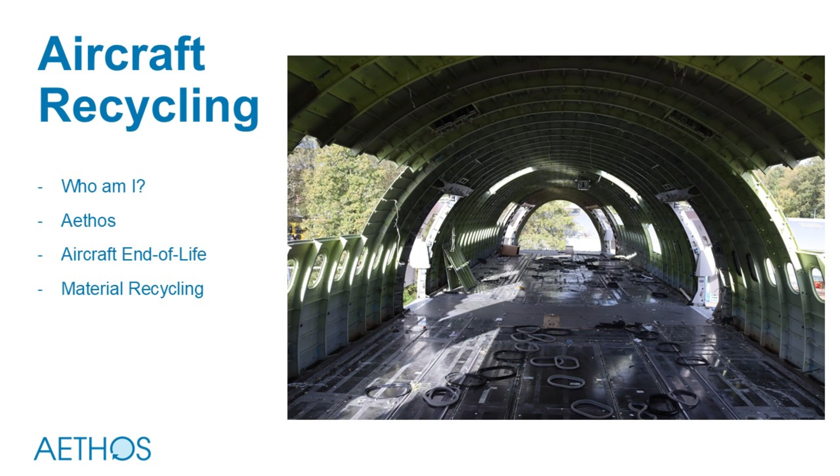Okay, so let me first tell you a little bit about myself. I was born in 1979, the 31st of December, so I'm from the 70s for 12 hours. To be honest, I was born in Rotterdam, but I am a PSV fan - is that okay, or is that an issue? I only lived in Rotterdam for one day, then moved to Oud-Beijerland. Not sure if some people know that small town. My mother was born there with a lot of family, and after that I moved to Brabant. But eventually I ended up studying aerospace engineering at the Technical University in Delft.

I did my thesis on the subject of how to recycle an airplane - a subject nobody had really done before. There was also a sustainability note possible on my diploma that I wanted, and I got it, because next to the research I also wrote a business plan. It was pretty clear not a lot of attention was being given to how to recycle airplanes already. In 2006, I was raising the bar, so I started a company called AELS, which stands for Aircraft End-of-Life Solutions.

The idea was to help people who stop flying an airplane do something with it as good as possible. So I built that company for many years. I even joined AFRA, the Aircraft Fleet Recycling Association, and became president of that foundation, where all the companies active in aircraft disassembly do it as good as possible. They share their challenges, share their solutions, and try to raise the bar in the safety of the aviation world, but also the safety for the people doing the jobs - all the elements that are part of safety, and making money I guess as well. Those were the discussions we had in that group.

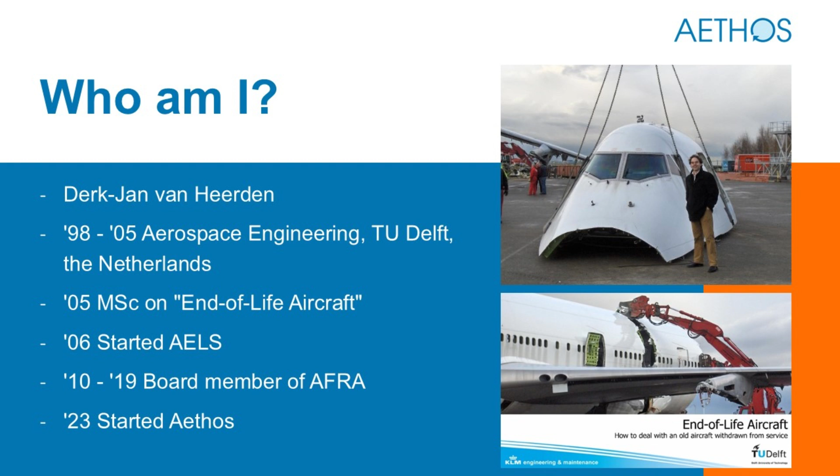But because of a reason, I stopped working for AFRA, because after 9 years on the board, where officially you were only allowed to be there 6 years, I was already an illegal president I guess. But I also left AELS, and then I started a foundation called Aethos, and I'm going to share more about what we're trying to do there. We're trying it - we're doing it actually, to be honest, yeah.

So what is Aethos doing? Aviation is very good at reusing components - I'll share more about that later, but it works pretty well. Some airplanes stop flying, and then parts are removed to keep other airplanes airworthy. Safety and all those elements are part of those challenges, but we can do that. Then there is repurposing - does somebody have an idea what that means? Yeah, just using the component for a different purpose than it was originally designed for.

A lot of people think about aviation recycling as having a piece of an aircraft at home designed into a table, or even done professionally, as with cockpits being removed. That's why in that picture you missed the cockpit, because it will now be used to build a simulator to train pilots.

Training in a simulator instead of flying an actual airplane is cheaper, obviously one of the main reasons, but also better for the environment, because flying consumes a lot of kerosene.

Then there's recycling, which means recycling all the materials left after everything that can be reused and everything that can be repurposed has been removed. That's where Aethos is working, trying to raise the bar on the materials that remain after all the creativity for reuse and repurposing has been done.

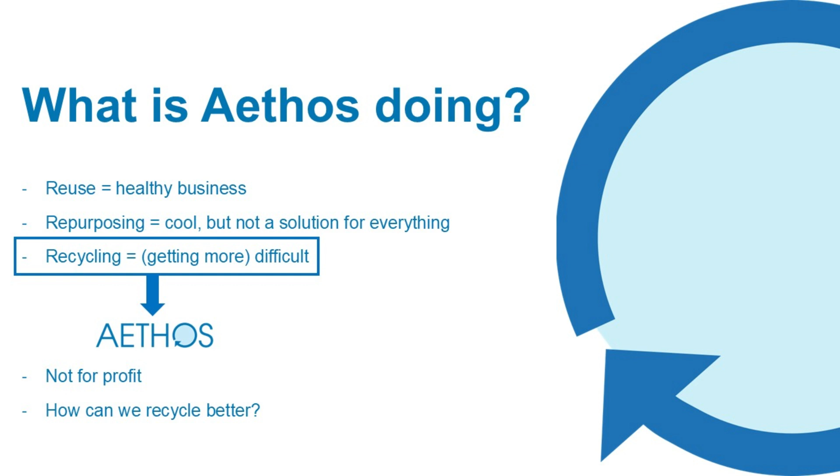Let me explain a little about how aviation works. There's a new airplane - currently there are two big builders, Airbus and Boeing, and they make an airplane, and those get older, right? They fly and fly. Does anyone know how old airplanes average before they stop flying?

I'm guessing it's pretty similar to the shipping industry, but I'm not sure.

About 25-ish, depending on the model and whether there's a cargo conversion where passengers are transferred into cargo use, which may extend the life. Some other aircraft are less interesting to do that with.

So that's probably pretty much similar to windmills as well, I guess, right? A lot of windmills will probably be somewhere around 25 years - at least I've been told. I'm not sure that's correct.

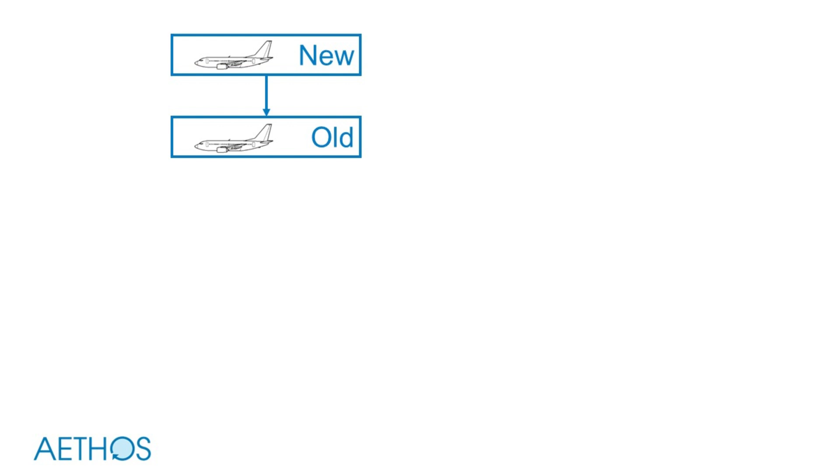When they get older, an airline will say, I will stop flying this airplane because I ordered a new one, or because I went bankrupt, or because they decided they needed a bigger one - all different reasons can be there. And then a decision needs to be made.

Depending on how old the aircraft is, but also where it is in its maintenance cycle, a decision can be made. Maybe somebody would say, I want to keep flying it, and that happens very often. Airplanes get traded all the time between airlines because someone needs extra airplanes, maybe due to issues with another aircraft type, or whatever the reason is.

However, if the decision is made that the airplane will stop flying, it needs to be disassembled. By disassembly, I mean the removal of parts with the intention of reusing them. And those parts need to be managed.

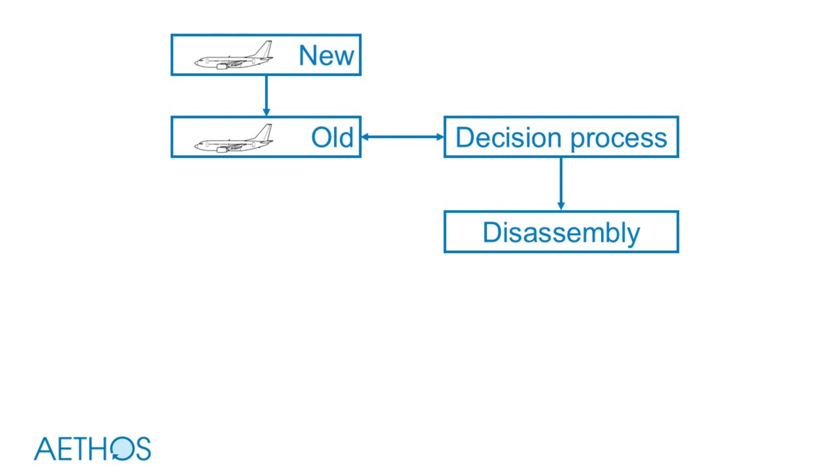In aviation, there's a lot of legislation demanding that airplanes don't crash. That means there are several parts in an airplane with at least 3 of the same component, because if one breaks down, you still have 2 working. Pressure systems are always tripled. There are certain elements limited to only 1.

Those single elements are always extra heavy, extra strong, to avoid failure, because if they break, you have an issue. In the old days, a lot of airplanes had 4 engines, because if one breaks down, you still have 75%. These days, many have 2 engines - if one breaks down, you only have 50%. But engine development improved so much that now many airplanes have 2 engines, because that way the weight goes down, fuel consumption goes down, and that's also a big advantage.

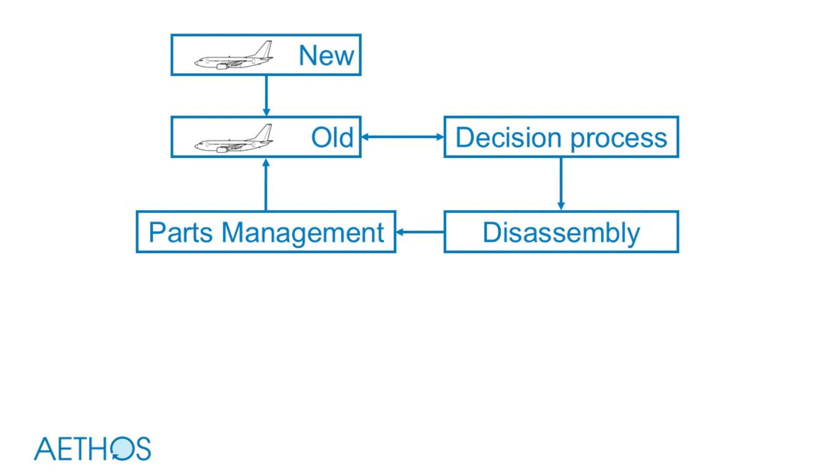So that's what I would call reuse. The reusing of parts is very well developed, and we're proud of that. But there's also stuff that's always left, because if you remove all the parts - the computers, the landing gear, the engines, all that stuff that can be reused to keep other airplanes flying - there's always something left.

And you saw the picture already. That's what we call dismantling, because that requires the splitting of some hazardous materials that need to be removed. The size needs to be reduced, because otherwise it stays where it is, since melting the aluminum, for example, requires it to be small enough so that you can sort it.

That's the next step. So the material that is removed after an aircraft is disassembled is chopped, and then those materials are brought somewhere and they try to sort it, and then a next process starts. In the best world, that would mean those materials are then melted to build another airplane. That's what I would call recycling.

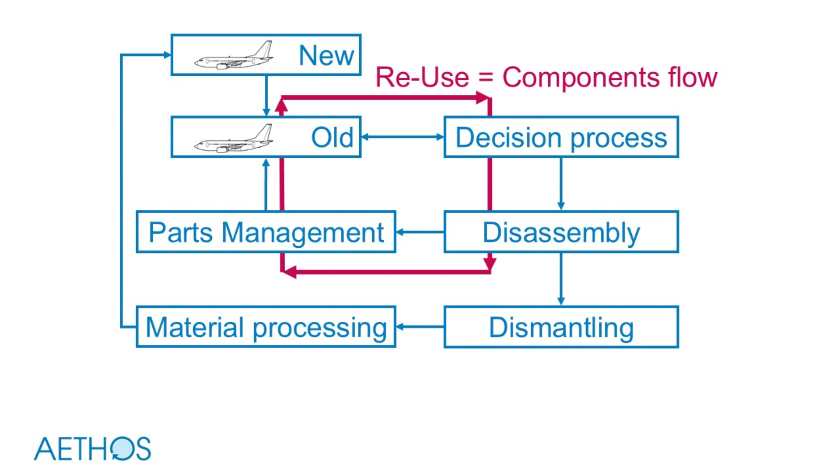And only the metal side is very limited - just a few percent of the total revenue when an airplane is disassembled. One of the big issues is that close to nothing is really recycled. I like the word recycling to mean that you melt it or do something with it that creates the same product again. In aviation, that's extremely difficult, because the demand for the quality of the material is linked to not recycling the material, since recycling gives you no guarantee of the quality of the material you're using - which is not totally true, it depends a little on the material you're looking at.

But that's why I like to say that a lot of material from aircraft is downcycled. And yes, the word downcycling sucks - I hate the word as well. I'm trying to figure out another word, but it helps me explain that the aluminum from aircraft doesn't end up making new aircraft - it's downcycled and created into something new. And that has several reasons. One is that a lot of different alloys are used and attached to each other, which makes it very difficult to separate.

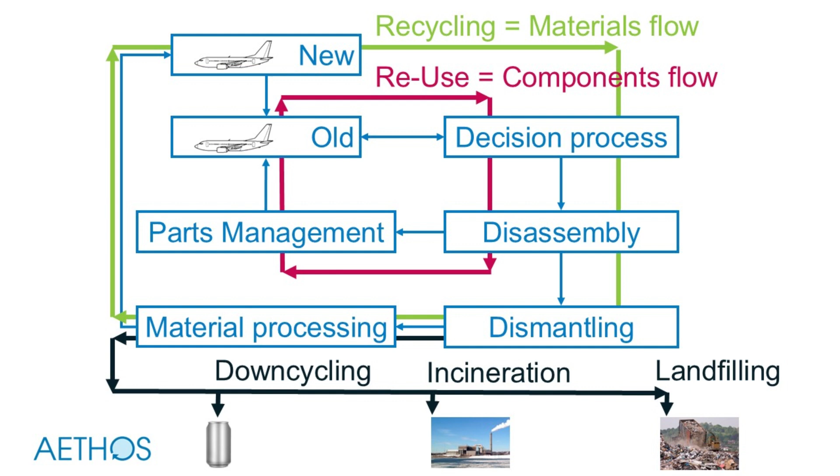So why is recycling not important? Because the question is, if I design an airplane, what will I be doing to make sure that the product, the airplane, is doing what it needs to do? And I'm guessing it's the same story when designing a windmill - you are considering a lot of different challenges. It needs to be cheap, it needs to be working correctly for a long time.

It needs to be safe. In aviation, that's always one of the important things - we want to avoid an airplane crashing as much as possible, preferably not at all. And that means that the people designing airplanes - as far as I know, I only met one person working at Boeing who was looking at the recycling of materials - but it was one person on a team of 150,000 people.

So it's not a very important decision process element in designing an airplane. And I don't agree with that - it should be part of the same decision process, as in, I'm building an airplane, and yes, if you decide to build it in such a way that recycling is not possible, that is okay, but then you need to explain why - for safety, for lowering the weight.

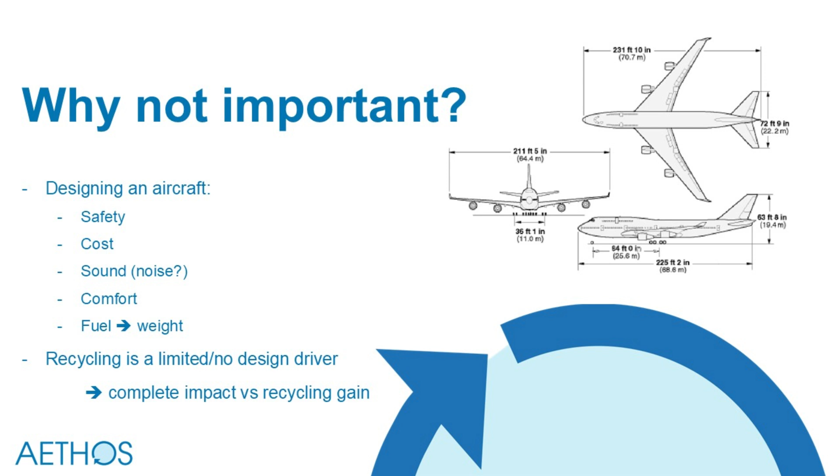Because where do you think most airplanes go when they stop flying in Europe? Will they stay in Europe or will they be flown somewhere else? Yes, correct - USA wins a lot of projects, and that has two reasons. One reason is they fly all airplanes more often than we do in Europe, and they have more demand for older aircraft parts, but they also have a lower demand on how to treat the safety of the people who are doing the work, but also how to deal with the waste materials, and that brings extra cost.

So that's what I want to share with you a little bit as well. My old company bought airplanes to sell those parts, but in some cases we would not be able to pay enough money for the seller. So they said, look, I will fly the airplane now somewhere else because they're going to pay more than you are, even though the extra cost of the flight is less than the extra money I'm going to get for the airplane.

So that's why I'm sharing this with three aircraft types. On one side, you've got a relatively new one, meaning that a lot of those spare parts are in demand to keep the same airplanes flying. Then, for example, an aircraft type where roughly 50% is already stopped flying - a lot of those spare parts are available, and then the demand is lowered.

And there's also this option of not being able to reuse those parts because it was part of an accident, or the records are incomplete and therefore the material can't be reused.

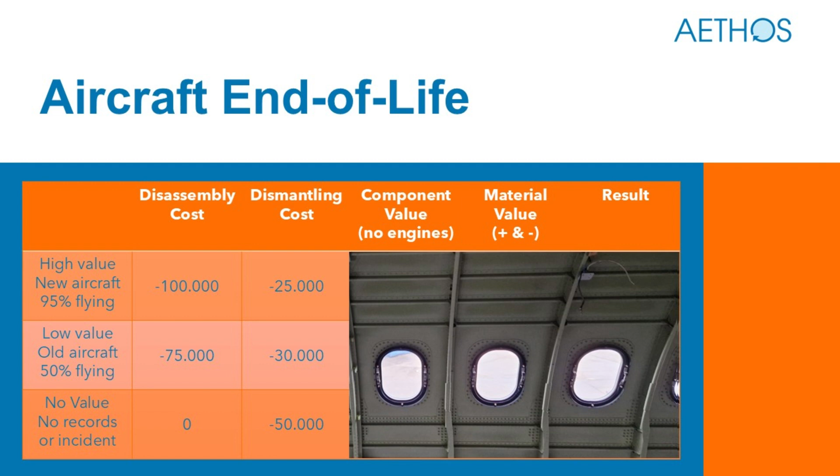But what will happen with the value? Because that's also important, and this is a very important indication. I'm referring to an airframe without the engines, because the engines have a different life cycle, and therefore airplanes that typically are disassembled have engines that are very good to reuse, and that is also influencing the value.

But you have airplanes - when you are buying one of the first 777s, or you're buying a 787 or an A350, then you pay way more for it, because there is way more demand for those spare parts as well. In some cases, you might be the first one to disassemble one, meaning you are the only alternative provider of those parts except the OEM. And that means you can maybe even sell those parts for more than they are selling them, because your delivery time is much faster than certain OEMs can be.

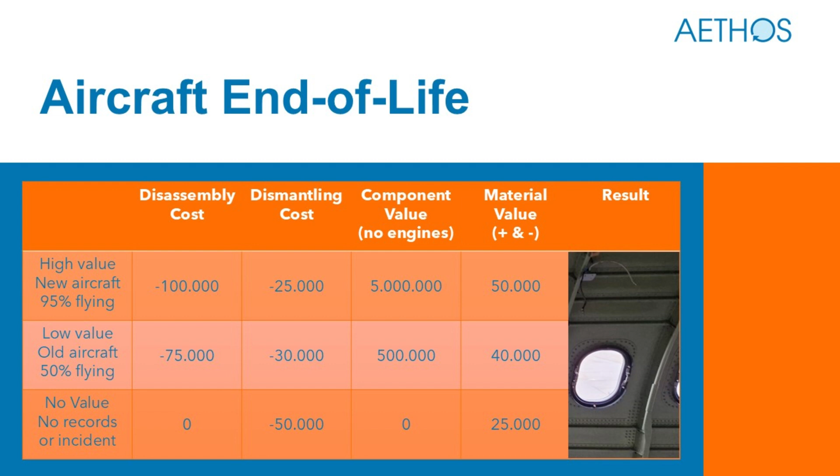And then the material value is way lower. But the more aircraft that are disassembled of a specific type, the lower the value of the parts are. And then there's way more of a balance between the metal value, or the material value, versus the parts value.

And that's the reason why a lot of airplanes are sent away from Europe to a place where they have better control over the cost. Because if you are disassembling an airplane and it would cost 150 instead of 100, it doesn't matter as much if it's worth more than 5 million.

Because selling those parts, you are maybe even closer to the market. And in some cases, somebody has an AOG. Does somebody know what AOG means? No? Okay, you're not in the aviation world. AOG means aircraft on ground. So then there's an incident or something is broken and they need a spare part directly. And then you get extra money for it.

So that's why all newer airplane models, disassembly within Europe happens very well. But the moment the value decreases, all of a sudden the buyers that have cheaper solutions, because they are not obliged to treat the waste in a good way, gives them extra lower cost, and as a result they can pay more for the airplanes.

And here's the number where you can see that it can be a very gigantic product where you can make good money on, or it can be much more challenging.

And in some cases, that's why in certain countries you see airplanes parked in the corner, nothing happening to it, because it costs the owners to get rid of. So if you go to regions that are a little bit more poor or less focused on the environment, you will land there and see, hey, why are there 10 airplanes here that look broken? That's because it will cost money to get rid of.

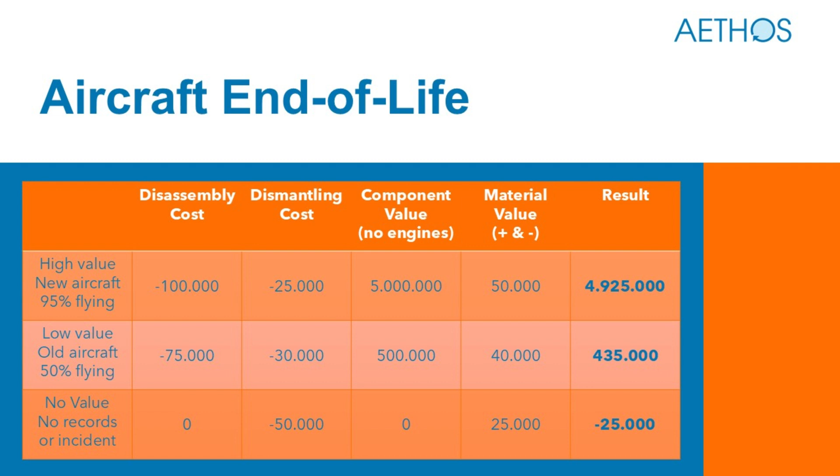Aircraft end of life - so the decision is a financial one. That's why airplanes are flown somewhere else instead of a location where the environmental performance is done correctly.

Reuse is a global market. So if I buy an airplane, doesn't matter where, because I will sell those airplanes also all over the world. But recycling is done local. And that means that the local legislation might raise the bar, bring extra cost, and as a result, the airplane owners will say, I'm not selling it to you, because they are willing to pay more because they have less cost.

So there are some other issues that I won't discuss too long, but who is familiar with the definition of waste? We see somebody raising his finger.

Yeah. So who knows about the transport of ships to India? There were some recent issues on that. It's illegal to transport waste. But the whole question is, when is something officially waste? And for some strange reason, aviation is successfully ignoring those standard rules.

Because in theory, if an airline decides to stop flying an airplane, and they know it's going to be disassembled, they're transporting waste. And transporting waste requires extra paperwork. Nobody has ever done that. And that's why this foundation is here to maybe prepare the aviation world, as in, okay, maybe we need to know a little bit better what type of materials are in there and how to recycle it and how to deal with it.

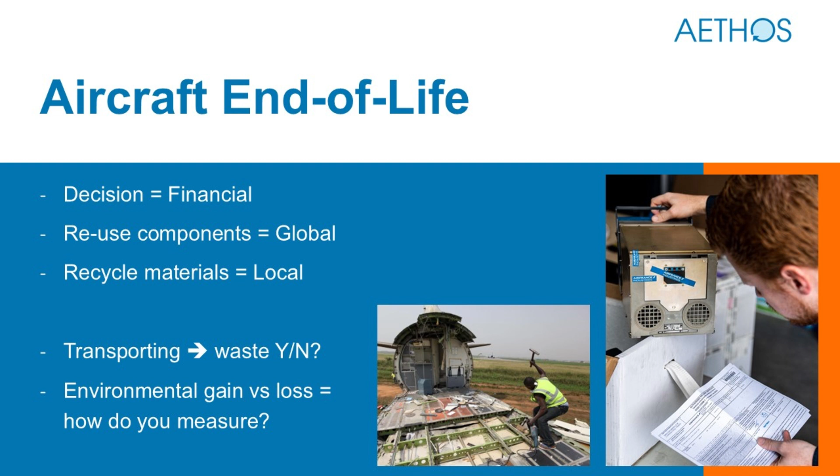Let me go to the next slide. One of the reasons why I'm sharing this with you as well is that raising the bar for recycling aircraft materials is that the quantity is very low. Just to give you an idea, we're talking roughly about 800 aircraft annually, which is close to nothing, right?

But if you then look at the amount of global material being recycled, you're looking at a much higher number. As a result, aviation is only 0.042% of the total metal that is recycled globally. And yes, we are active in aluminum, and aluminum is less of the total.

So if we assume we recycle everything, it's still nothing. But if you only focus on aluminum, then it's also 0.05%. So yes, aviation should be focusing on doing it better, but the question is, are we important enough for the recycling world to consider helping us improve how we recycle airplane materials?

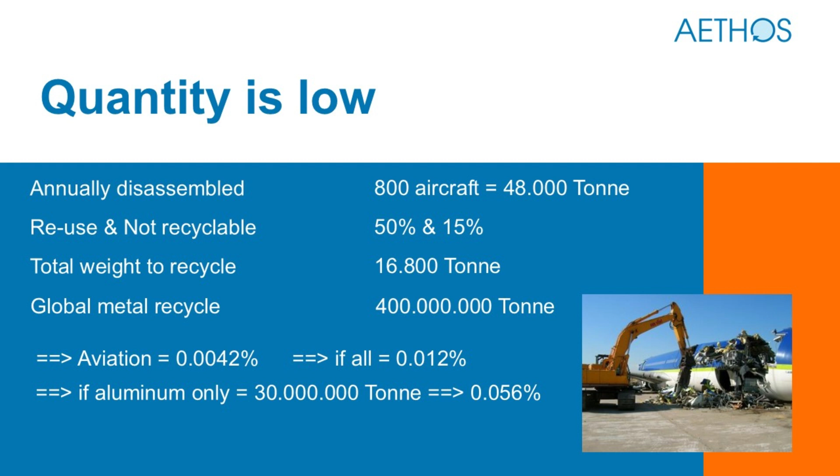Then there are also a lot of special materials, and there are a few here. Who's somewhat familiar with Chrome 6? I'm guessing some people are confronted with it now as well, because there's some news. In the Netherlands, we are dealing with Chrome 6 in a very special way. But aviation airplanes are still being painted with Chrome 6 paint on them. What can be done with it?

CFRP, of course, is also an important material in new aircraft these days, because what are we going to do with it? It might end up in landfilling, and that is very comparable with windmills. I know you guys are not active in the windmill itself, all the parts that help those machines, but what are we going to do with it?

Aethos, to be clear, is only focusing on solving the issues of materials that have already been produced many years ago. So we're not trying to tell them, you made this part from that material, maybe you should make it now from this other material because it's better recyclable. No, we try to help them by saying, okay, you've chosen this material, maybe we can do this, and then the performance and the solutions are better.

That's what we're trying to do, and we're making steps. We've done our first research, which will be reported soon, including measuring how much the recycling rate actually is, because a lot of companies say they are recycling airplanes at 95%, and then you ask them, how did you calculate it? Yeah, well, maybe we did it a little bit like this.

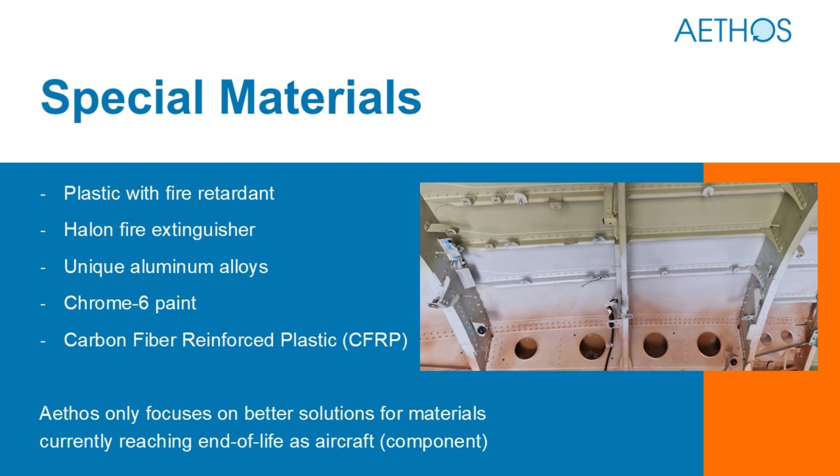So this is what we're doing. We are focusing on helping the recycling world better understand what aviation can bring, but also teaching the aviation world how they could better recycle. And to be clear, if we find a solution that will cost money, it will probably never be developed, because people don't want to do it. So we only pursue solutions that are either making some money, so somebody can invest and profit from it, or at least provide a similar solution from a financial point of view.

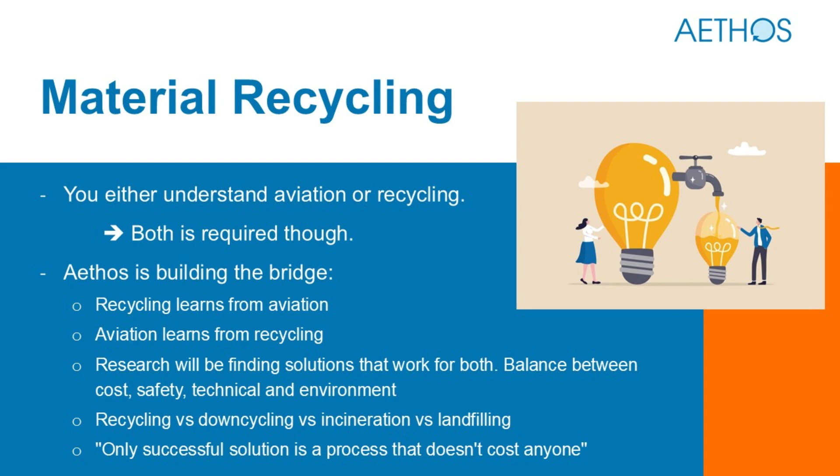That's it. How much time do we have? Very good, thank you. I had no questions. I have a lot of questions. Oh, you? Okay, I'm lucky. Thank you for that, because I was worried they might have some questions as well.

I was just wondering, do airlines sell airplanes, and then other companies like your old company try to reuse and recycle the materials? Do Airbus and Boeing also buy recycled materials for their new planes, or is that not the case yet? So the closed loop that I was showing is close to not there.

The only route might be on engine parts with special metal alloys in them. That might be possible to close the loop, because those parts are relatively easy to separate, and then it's just one metal, meaning that melting it results in the same material used to make that part. Also, to be clear, the manufacturers demand virgin material, as in they don't want it recycled, because they are worried that the recycling route will pressure the quality.

As in, they demand, for example, a certain amount of alloy metal as part of the mix, say 1%, but it can't be 1.001%, it needs to be exactly 1%. And the aviation industry simply doesn't want that, so far. Let's hope they make steps, that they will change, or maybe the recycling process will improve so it fits those standards. They do research here and there, and then the question is, are they doing the research to show the world they are focusing on recycling, or are they really trying to find a solution for a challenge?